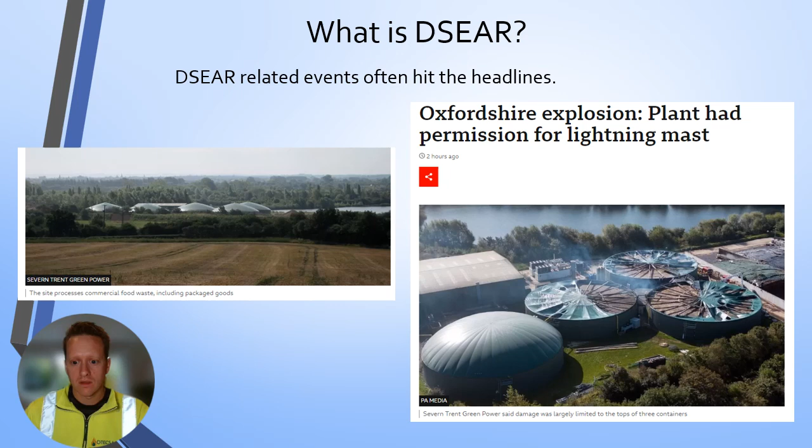And on the right you can see the aftermath of the explosion. It's understood that there was a lightning strike and there wasn't adequate lightning protection, and this then caused extensive damage. I can imagine that site's going to be down for quite a while. Thankfully, it doesn't sound like there's any injuries from this. They're generally not that heavily manned, these type of sites. But that's an example of a DSEAR-related incident in industry that we might cover with a DSEAR risk assessment.

So what is DSEAR? It stands for the Dangerous Substances and Explosive Atmosphere Regulations, 2002. And very simply, it's dealing with anything that could catch fire or explode under normal circumstances in a work environment. So just as a little summary of some examples of DSEAR related materials. Petrol, do we think that's covered by DSEAR? Diesel, alcohol, sugar, and metals.

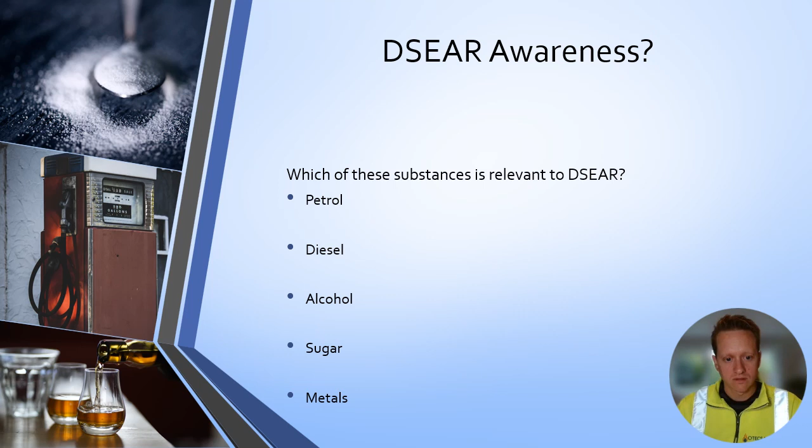So petrol, absolutely. The flashpoint is around ambient temperature. It's very flammable, so it's definitely covered by DSEAR. Diesel, there was some recent change to the guidance, and diesel came into the DSEAR regulation scope. So anywhere with diesel needs to have a DSEAR risk assessment, even if there's not a specific fire risk from it. Alcohol, most of the time alcohol is covered by DSEAR. If you've got low strength alcohol, beer, wine maybe, not so much, but if you're producing higher strength spirit products, then yes, absolutely, DSEAR is relevant.

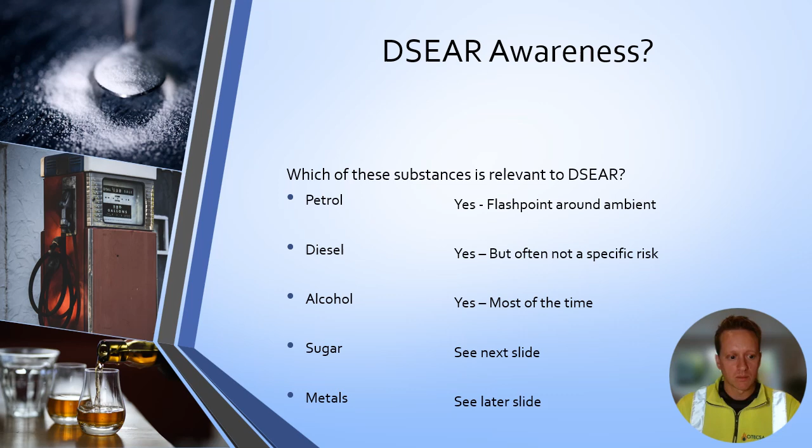And sugar and metals, the short answer is yes. Some of these maybe people think are inert, not that hazardous, but in certain forms they can be. So we've got a couple of examples from incidents of these materials.

So sugar is a huge dust explosion within a facility in America, in Georgia, which unfortunately killed 14 people, with many more injured. This was generally caused by a lack of housekeeping and management of change, where they changed some processes and changed the way the dust was generated and contained, which found an ignition source and ripped through the facility, causing secondary explosions, as we call them. That's when the dust in an area is dislodged, causing a secondary dust explosion risk. And as you can see from the photo there from the site, a lot of it was destroyed by this event.

In the United States, they have some very good investigations carried out and do some great recreation videos for the Chemical Safety Board. So this is one of the ones that's covered by that. There's a very good online video of the Imperial Sugar investigation report.

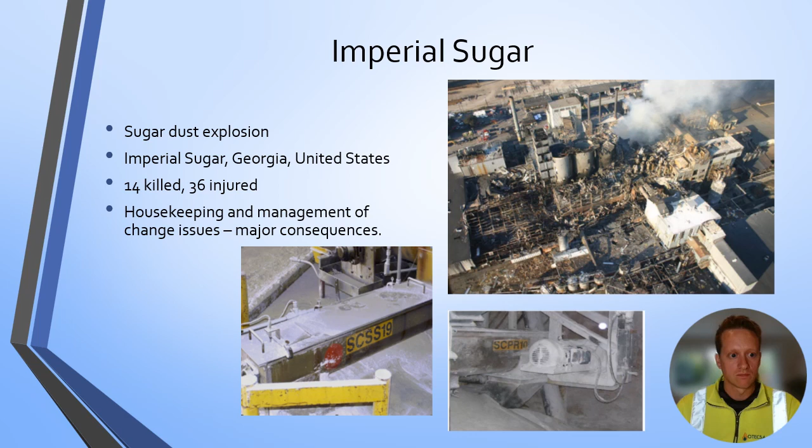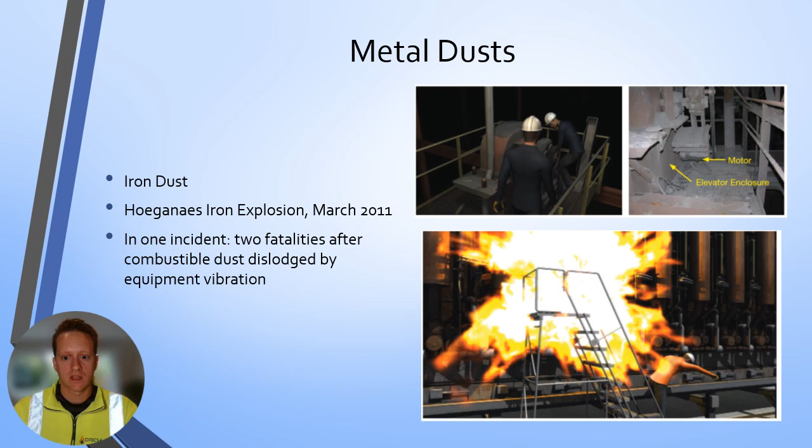Another example covered by the CSB in America is the Hoeganaes explosion. This was actually a series of explosions over several months. Generally, again, lots of housekeeping issues, and iron dust is very energetic from an explosion perspective. In one incident, there were unfortunately 2 fatalities when some combustible dust was dislodged by equipment vibration. Again, you can see that's not a photo of the explosion, but it's a recreation from the CSB video. So metal, explosive, yes, in certain forms. Sugar and other organic materials like flour, definitely explosive as well.

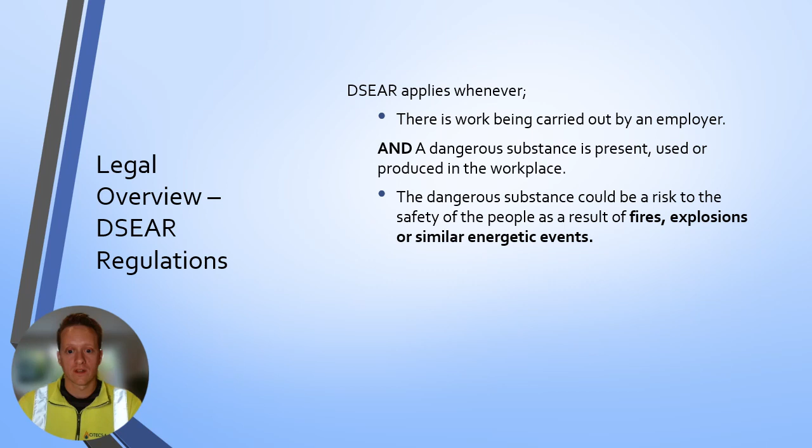So DSEAR applies whenever there is work being carried out by an employer and a dangerous substance is present, used or produced in the workplace, which could be at risk to the safety of people as a result of fires, explosions or similar energetic events. So that means that things like high strength acids and alkalis, if they're stored together, if you could get some sort of mixing and energetic events, then DSEAR should really be covering that too. So not just things that can explode or cause fires, but other energetic events. DSEAR is the UK's implementation of the European-wide ATEX directive.

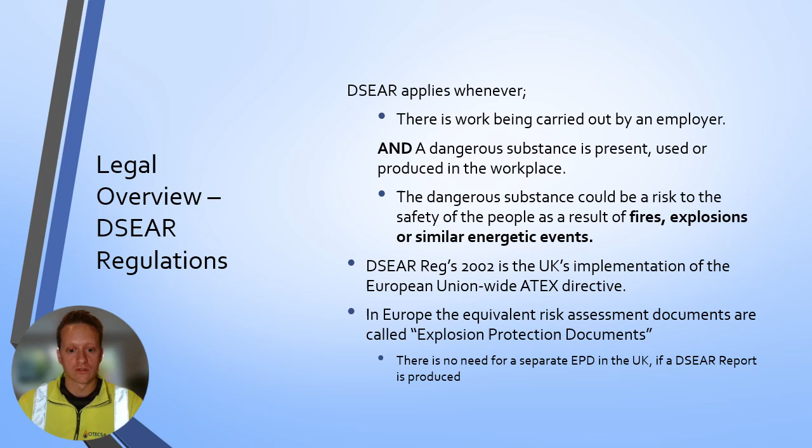In Europe, you don't get DSEAR. The relevant document you produce is an explosion protection document. Often in the UK, they're also badged as this, but there's no need for a separate explosion protection document in the UK if a DSEAR report is produced. The DSEAR report should cover all the relevant aspects of the EPD.

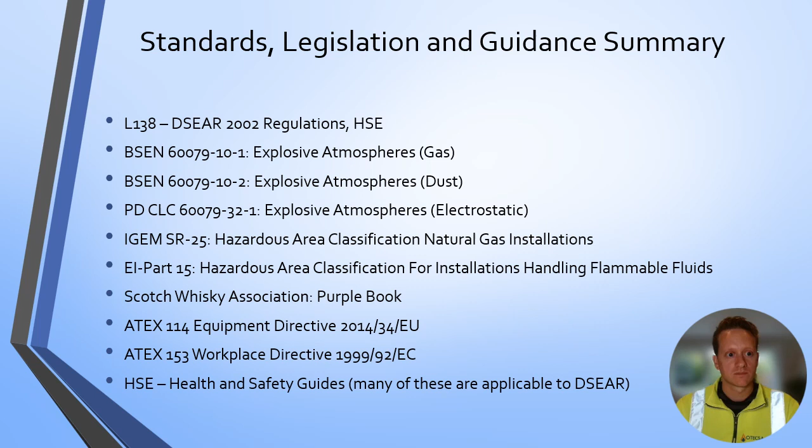So how do we do a DSEAR risk assessment? The first step is to carry out the risk assessment part, where we identify what hazardous scenarios could occur. Typically this is with site surveys, or at design stage we may look at talking to the operators and understand how they're going to operate the plant, what could happen, what could go wrong.

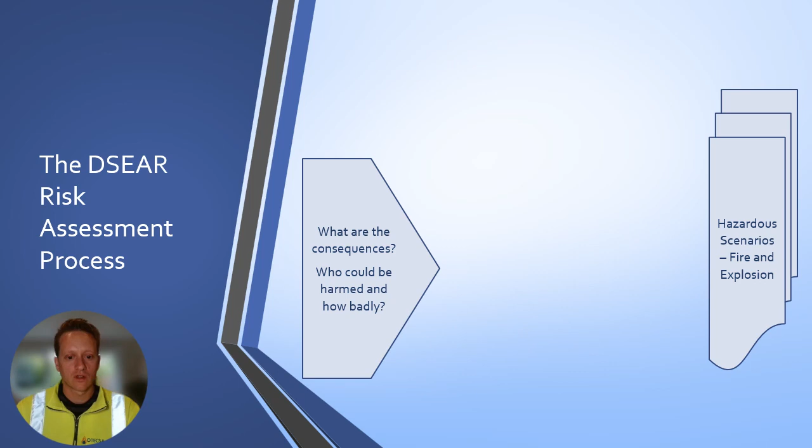You would try to understand then what are the consequences, how badly people could be harmed by this, how many people. And then you look at, as with any risk assessment, what currently is in place to prevent that happening, what emergency measures are in place, and what else you could do to prevent the event occurring. So all of that tells us how you could cause a scenario, and the prevention measures and the additional steps you're going to take tells us the basis of safety for the event.

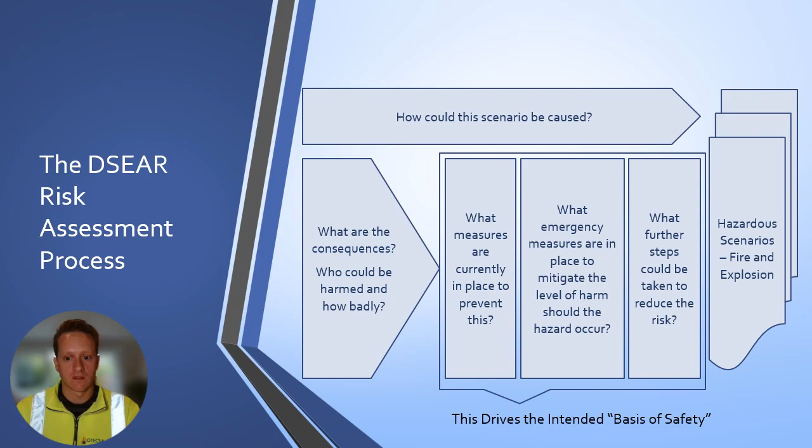Here is the output from a typical DSEAR risk assessment. It covers all the aspects I've just mentioned on the slide before. It looks very much like a HAZID risk assessment, which is a top-down hazard study. So what we've captured here is some actions for improvement, and after we've done all these steps, we look at risk ranking the scenario.

So the risk prior to implementation of actions, and then the risk after actions that we have implemented. As you can see on the bottom, there is a risk matrix which has increasing severity on the left and the frequency of the event on the bottom. So we're looking to reduce the frequency to the acceptable region with the implementation of additional measures. It may be that existing measures are already sufficient to take it to a low risk, but often there are improvements that can be made, and they would need to be looked at in some cases on an ALARP basis, which is when we consider the cost versus the benefit of the improvement.

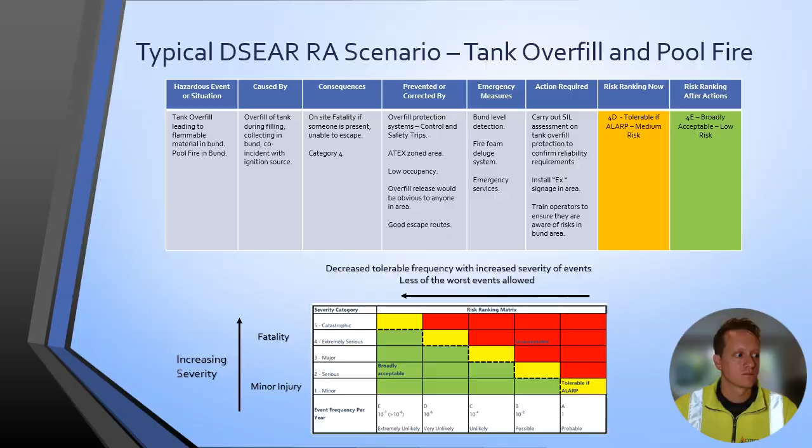Output from DSEAR risk assessments. Typically there would be recommendations in the areas of all of these categories you can see here. Maybe procedural recommendations, organizational controls that need to be put in place, engineering controls that are recommended, competency or training requirements to be implemented, other relevant recommendations based on good practice in industry, and there may well be the requirement for hazardous area classification.

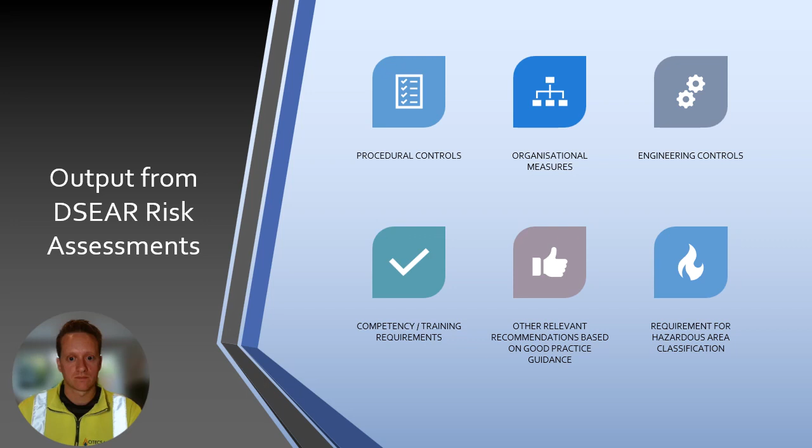So hazardous area classification is where we need to control ignition sources because of the risk of flammable atmospheres being generated. This could be vapors as a result of liquids being handled, it could be gases, and it could be dust produced from solids handling equipment or dust equipment.

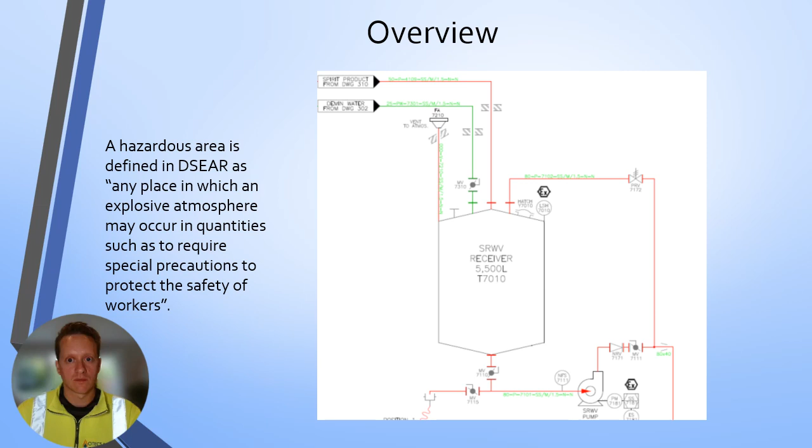So here's a typical example. This is a distilled spirits receiving vessel, relatively small, with a recirculation system. And this is just to show you the output from a hazardous area classification. That is a very in-depth subject. We're not going to get into it, but in our training course we will get a lot more into this topic.

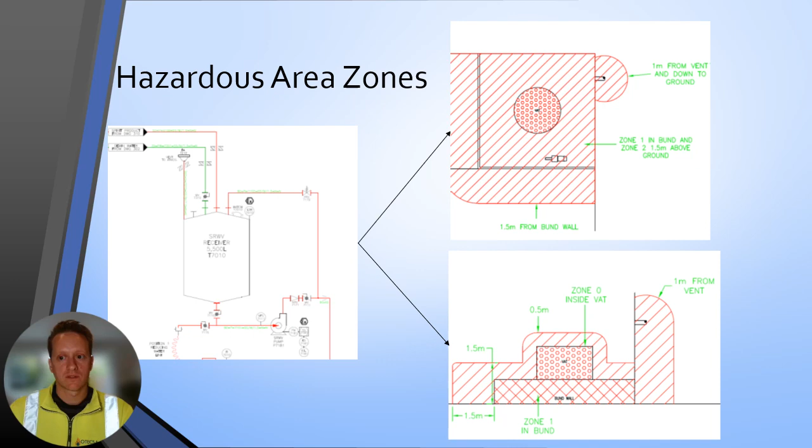So we take our equipment and we carry out the zoning assessment, which then we produce drawings from, so that anyone looking to install equipment or understand how to control ignition sources knows where they need to control ignition sources in that area. You would then select suitable equipment and other ignition source controls to prevent ignition sources in the area, and your hazardous area classification should come with all the relevant information to let you understand how zone sizes were produced, and what the equipment specifications need to be in those zones.